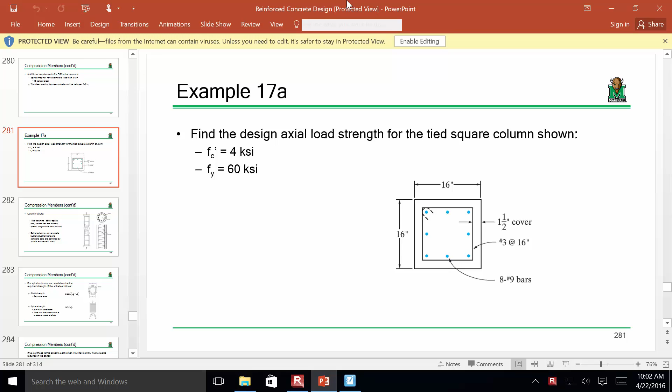So a couple things. You all have your homework 8 posted on Blackboard. It is the last assignment of the semester. I have a few hard copies up here, which means you might not have them. In addition, I also have homework...

I have your lecture notes for columns up here. What I'm going to do is finish these lecture notes today. We'll see if I can get through them. If not, they may bleed a little into Monday, and then we'll finish your last slides on beam columns.

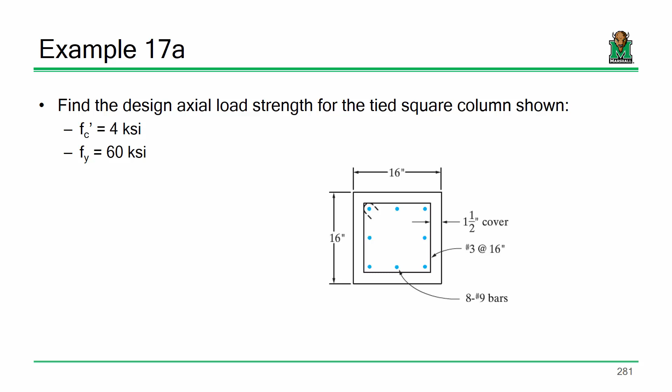We kept sucking at it. David never mentioned a thing until like the last lab. Oh, by the way... I was like, hey, get the tree behind that one. He's like, which one's that? I'm like, the one that's farthest away. He goes, I don't have depth perception.

All right, back to the world of concrete design. So last time we did an analysis problem of a square column. Today we're going to do an analysis problem of a circular column, and it'll be a fairly short one, and hopefully we'll be able to get into design today.

What I want to do though is get a little bit into the world of spiral columns. So tied columns, the way that they fail, if you recall, once the concrete spalls outside the rebar and the rebars begin to buckle, it's over. The column's gone. Spiral reinforced columns, on the other hand, serve to contain the concrete inside the core a little better.

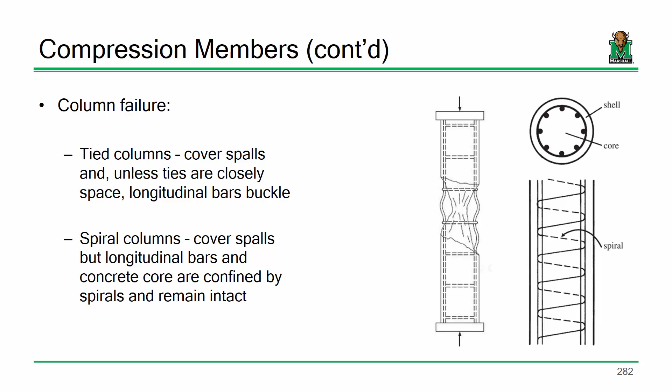It's a lot like a pressure vessel that you all did in mechanics of materials. You have a cylindrical pressure vessel, there's a pressure inside, and you develop that radial stress and that hoop stress. I know you've done it before, I know I did it with my deformable folks. You say that like we actually did. Oh yes, you did. Yes, you have.

So the idea behind the theory is that once the concrete on the outside of the cage spalls off and fails, you've got this core of concrete inside your spiral reinforcement that's being subjected to compressive load, and it's a lot like a pressure cylinder. You have a cylinder, you take a compressive load, that cylinder develops internal stresses. The same provisions that come from that are what we use here.

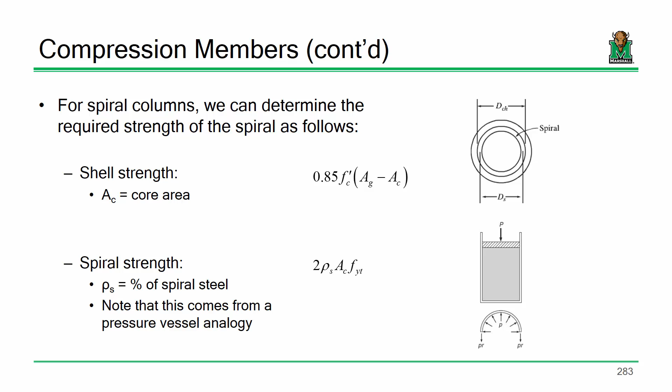For the shell strength, we say it's 0.85 f c prime times the gross area minus the area of that core inside. Now for the spiral, we basically say it's 2 times the reinforcement ratio times that area. That 2 basically just comes from the pressure vessel analogy that you did in mechanics of deformable bodies. I promise you did it.

So basically the idea is you're setting these two equal to one another, and you're trying to determine do you have enough of a spiral reinforcement ratio, enough of that spiral steel, to resist the capacity of that load inside the core. So you're basically just setting the two equal to one another and solving for rho.

Now what does the code do? Technically the math comes out to be you get a constant of 0.425 because you take that 0.85 and divide it by 2. Code says, just round it, keep it simple. So that's where you get that reinforcement ratio.

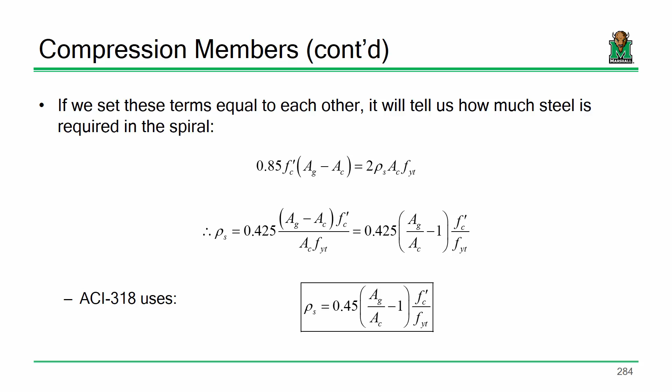Now how do you actually compute that reinforcement ratio? It's a little different because it's not just area of steel divided by area of the concrete, because you have to consider you're trying to determine that percentage of steel spiraling up the column. So we compute it as the volume of the spiral divided by the volume of the core to get that percentage. Now how do we do the volume of a core?

We're looking at that percentage within a given pitch, within a given increment of spiral spacing. For the concrete, it's the volume of a cylinder. And how do you calculate the volume of a cylinder? It's the area times the length. So the area is pi d squared over 4, the diameter of that core, and the height is just that pitch, S.

Now how do we compute the volume of the spiral? Basically we're taking the area times the length, and that length is essentially the perimeter around the circle. So that's where we get the area of a single spiral bar, and then the perimeter. How do you calculate the perimeter? It's pi times the diameter.

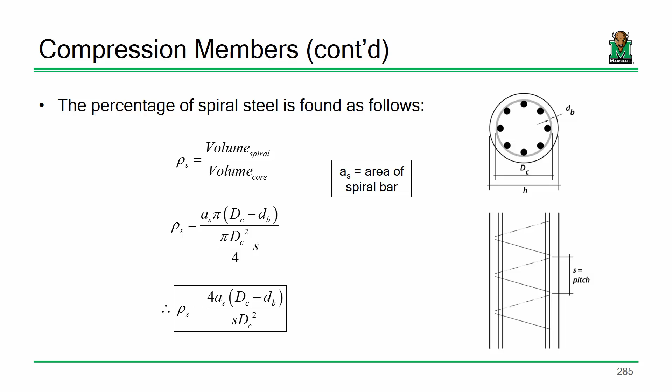Why are we subtracting a bar diameter? Because you have to come in half a bar diameter on one side, half a bar diameter on the other. So this is what you see in this box. This is the actual reinforcement ratio that you're getting from that spiral reinforcement, and that's your limit. As long as you have more than that, good to go. Does that make sense?

Good stuff. All right, so we're going to look at the design axial load of this column. I think you're going to find that it's a pretty straightforward analysis. The only thing that changes are some of your constants inside your capacity equation. The phi is different, the alpha is different, but ultimately the capacity is pretty straightforward. In addition, we're going to do that spiral check, and I think you're going to see it's pretty plug and chug.

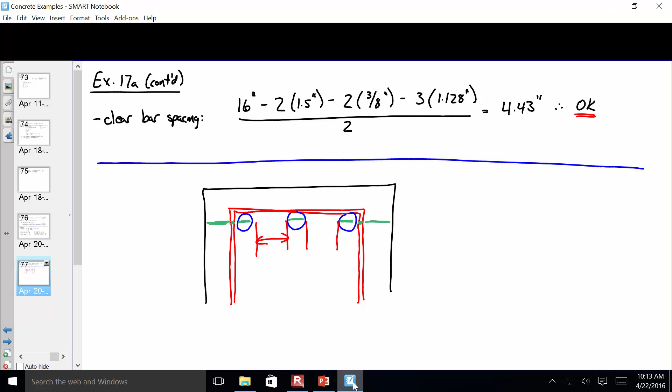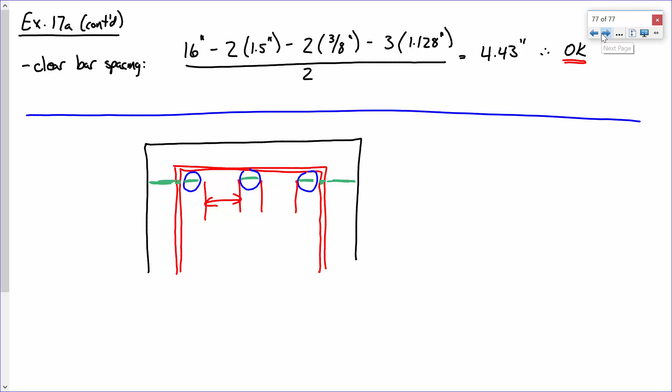Bar diameter, I can see how that would be confusing. It's very common to use that symbol to represent a diameter. Yep, that's pretty common.

Okay, so let's look at some column parameters.

All right, so we've got our typical material parameters.

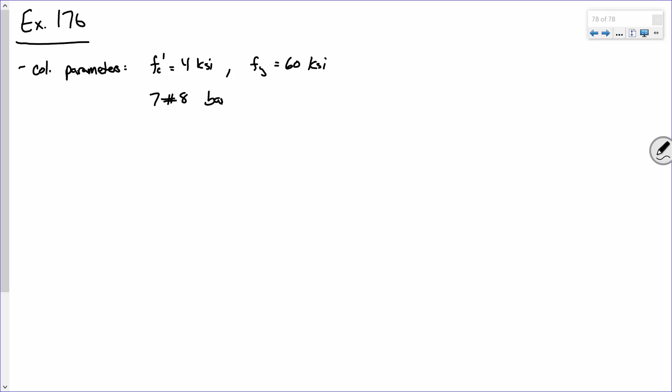Now, for our longitudinal steel, we have 7 number 8 bars. Does anybody remember how to calculate the area of that?

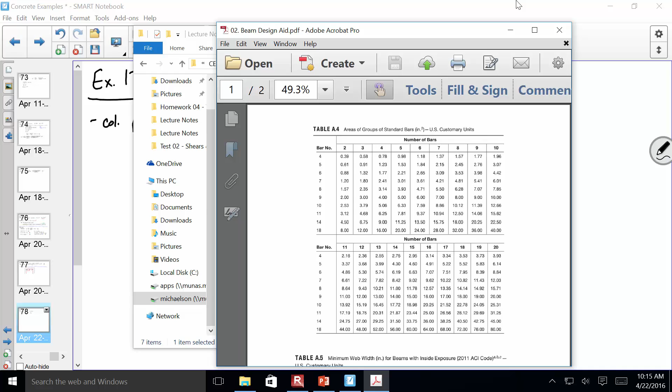There you go. And what is the area of 7 number 8s? No, that'd be if it's number 9. Do you remember this? So 7 bars that are number 8 in size, the area is 5.5. Remember that?

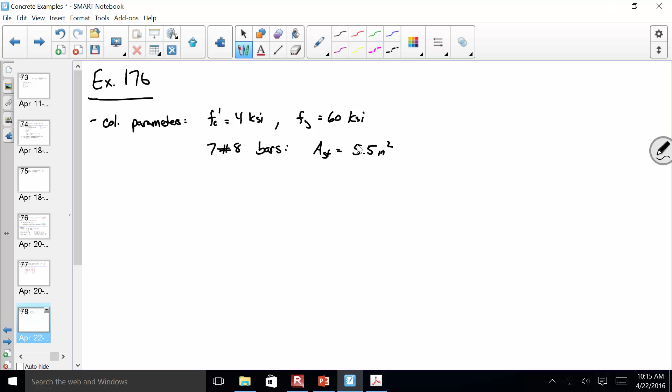All right, now we have a diameter of the column of 15 inches. And what is the area of a spiral bar? What are the spiral bars? They're number 3s, right? So the area of a number 3 is 0.11, right? Y'all okay with that?

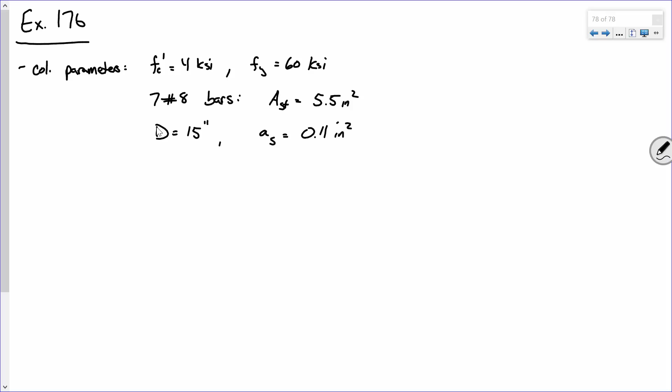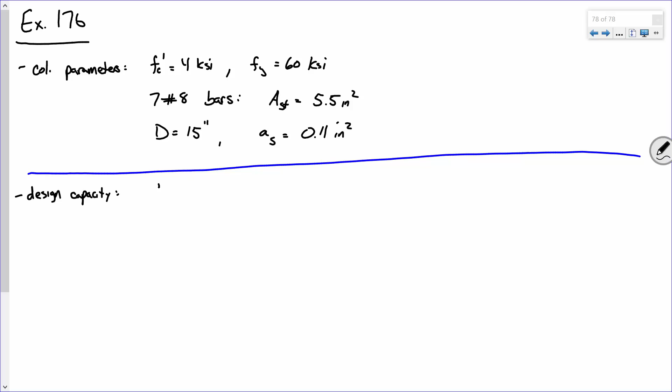Excuse me, so for the design capacity, it's pretty straightforward. We're dealing with a spirally reinforced column. So what's phi? What's alpha?

Make sense? Now, how do we calculate the gross area of the column? Before, it was just rectangular, so it was b times h, or b squared, because it was really a square column. How do we calculate the area? It's a circle, so there we go: pi over 4, d squared.

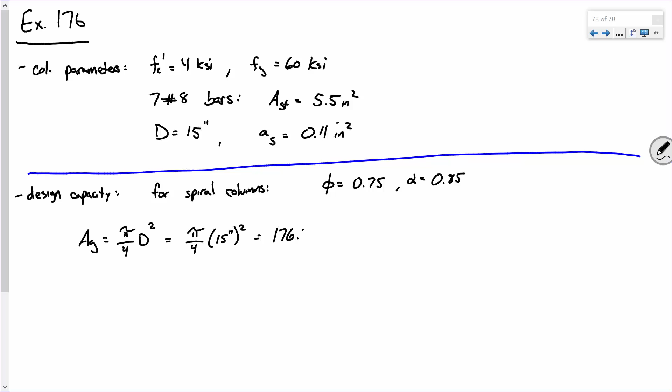Not too bad, right? All right, so...

So to calculate phi PN, we say phi times alpha, and then we've got 0.85 FC prime times the area of our concrete, which is just AG minus AST, plus FY times AST.

So filling this in, somebody help me out. What do we got?

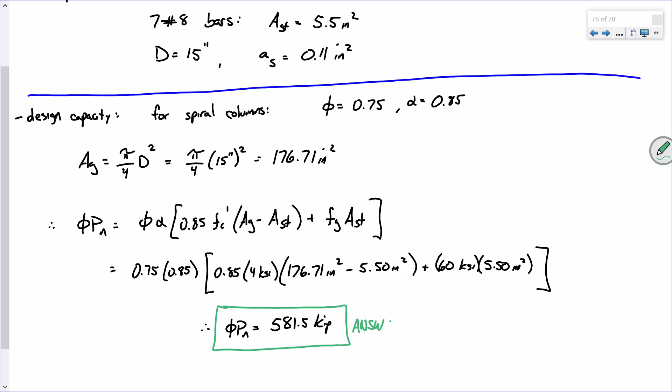That's it. Well, we also are going to check the spiral steel, but in terms of capacity, yeah, that's pretty much it.

True, but even then, that's a pretty plug and chug expression. You like this stuff? Honestly, the beam column design and column design, it's pretty simple. It really is.

That was a good one. He said he hopes it doesn't spiral out of control. Just saying, when you graduate and you're gone, I'm taking credit for that one. Just saying.

All right, has everybody got everything on this? Am I good to move on? Okay.

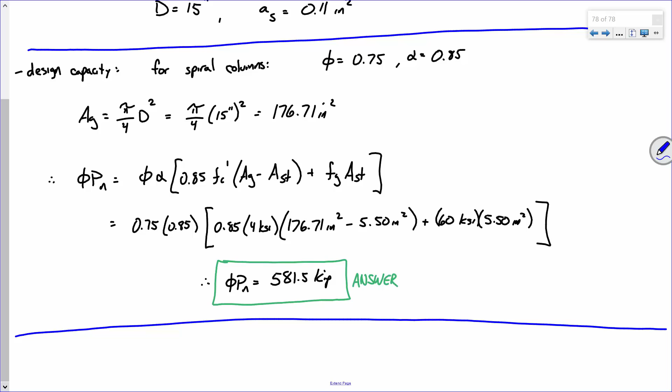I do this the whole time.

All right, spiral steel check. Okay, so it's pretty straightforward. I'll walk you through a couple things. So we first off need to calculate the diameter and the area of the core.

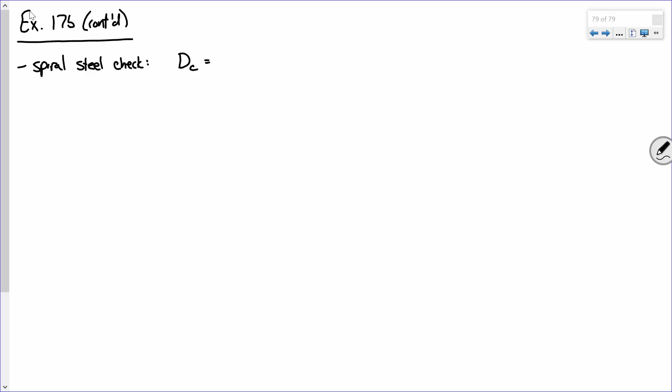Now the core, what we do for that is we say, all right, and we keep it simple. We say, well, the whole column is 15 inches, right? And the cover is 1.5 inches, right? So we just come in 1.5 inches on each side.

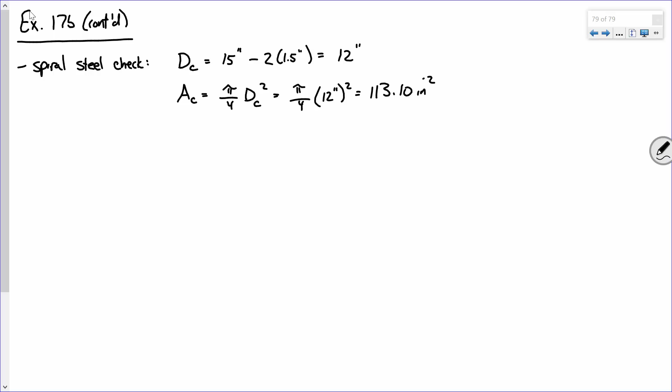And say the core column diameter is 12 inches. So we can calculate the area of the core by saying pi over 4 DC, or DC squared, and get that.

Okay, so it's pretty straightforward. We start off by computing our spiral reinforcement, what we actually have in terms of a ratio. So we're calculating the volume of steel in a single pitch divided by the volume of concrete in a single pitch to get that reinforcement ratio.

And that is 4 times the area of a spiral, DC minus DS, in that core diameter, but we come back off of, we come back 1. And then S DC squared. So 4 times 0.11 inches squared minus... now, remind me, what is the diameter of a number 3 spiral? 3/8. There we go. Remember, number 3 to number 8, you divide it by 8.

What's the pitch? What's the pitch of our spirals in this problem? 2 inches. Plug and chug, and what do we get?

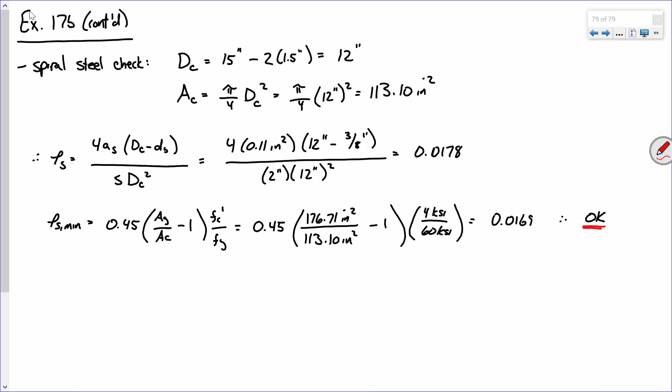Yes. Well, okay, that's a good question. And what I'll say to that is this: spirally reinforced columns, you confine your core better, you get a bump from your eccentricity and your phi value, and down the road, if you ever run into things like seismic demand and what have you, they perform better in seismic situations. So good question. Where'd my little mouse? Okay.

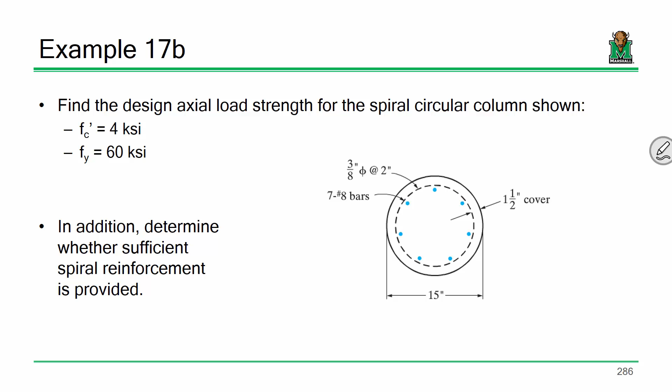We're going to talk about design here in a little bit. The design is, again, the design is simple, okay? Let me explain how design works. So if you liked the analysis, you'll probably like the design as well. Okay, all right, so column design is pretty straightforward.

You start off by saying, all right, let's figure out our factored load, 1.2 dead plus 1.6 live. Let's take a wild guess as to what our reinforcement ratio needs to be. It's got to be between 0.01 and 0.08. That's code limits. A good starting value is 0.02. 0.03 is not the worst idea in the world. Most of the time, I'll dictate that to you, what you need to use for a starting value. But if you don't know, 0.02 is a good place.

Now, here's the thing. You're going to do that so you can solve for the gross area of the column. Now, what's going to happen is you're going to say, all right, let's solve for the dimensions of the column, and you get 15.82 inches. Are you going to design a column that's 15.82 inches wide? No, you're going to say, let's use 16. So you're going to take the column and use a different size. So now that you've got a different column size, go back and solve for the steel that's required. Okay, after that, check your details.

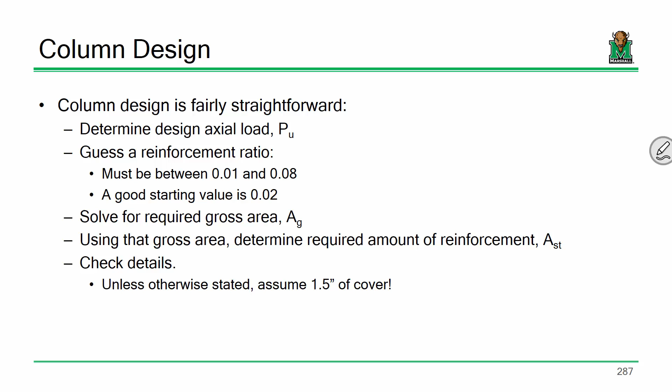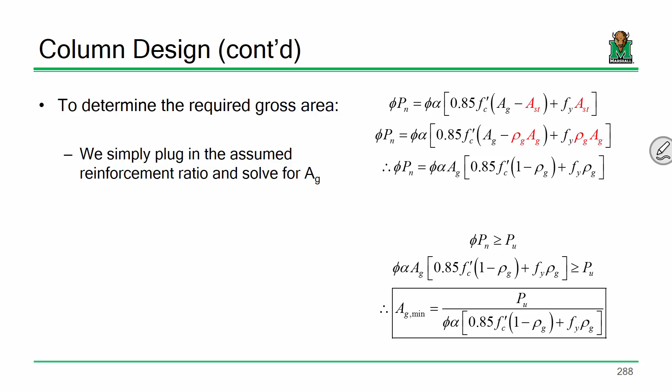That's it. So here's how this works. So in order to determine the required gross area right here, basically what you do is you set phi-PN greater than or equal to PU, and you solve for the required gross area, and it's pretty straightforward. We make a blanket assumption right at the beginning that the area of steel that goes into that column is the gross area of the column times this assumed rho g value. That's where that 0.02 comes into play. So assume a rho g value, plug and chug. You'll get a gross area of the column.

Then you've figured out your dimensions. Take those dimensions, plug them back into the expression, solve for the area of steel. You can't just take that new column and multiply by 0.02 to get the steel. You have to actually go through and compute it, because your column dimensions at that point are different than what you solved for. So, but in the end, everything's already derived for you. It's pretty plug and chug. Solve for your gross area, pick a column size, solve for the steel. Pretty straightforward.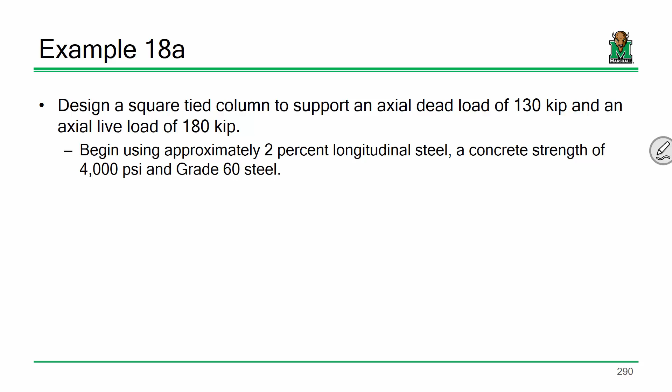Okay, so let's start off with A: dead load of 130 kips, live load of 180, 2% steel, 4 KSI, 60 KSI concrete and steel respectively. All right.

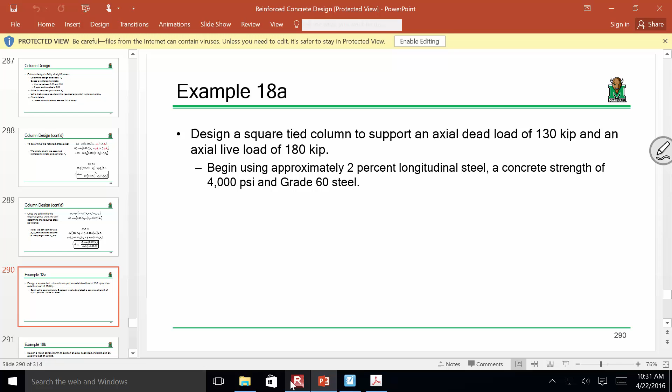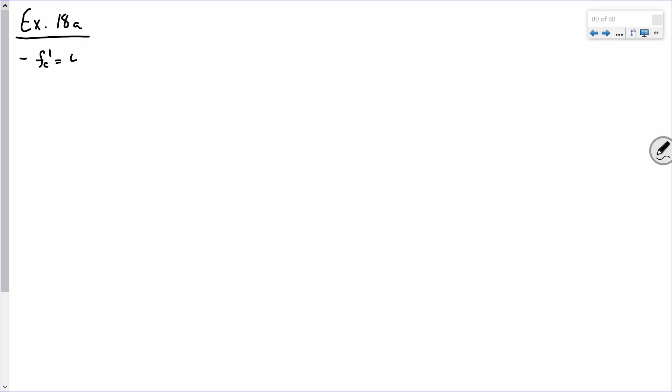So now we are in column design mode. So we've got, I'm going to put it like this, our starting rho value is going to be about 0.02. That's going to be our starting value. All right? We've got a dead load of 130 and a live load of 180.

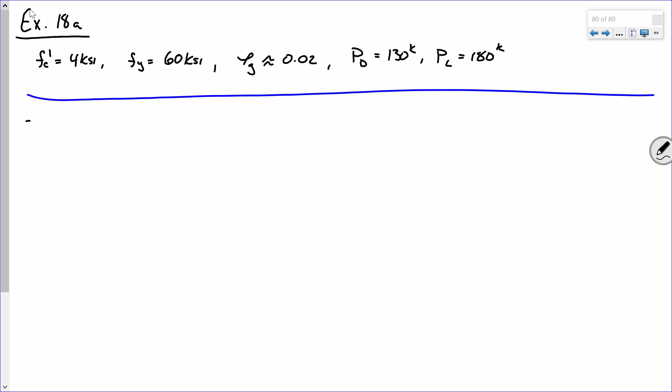What's the first step? Factored loads. Should be old hat by now. I have a feeling some of you have already done this. What do you get? There we go. All right.

So now if we go into column design, if we're dealing with a tied column that is square, what's phi? And what's alpha? Therefore, our minimum gross area—and again, this just comes from taking phi-pn, set it equal to pu, make a guess on your steel, and solve. It's pretty straightforward. So on the bottom we have phi alpha—whoop, I'm getting ahead of myself.

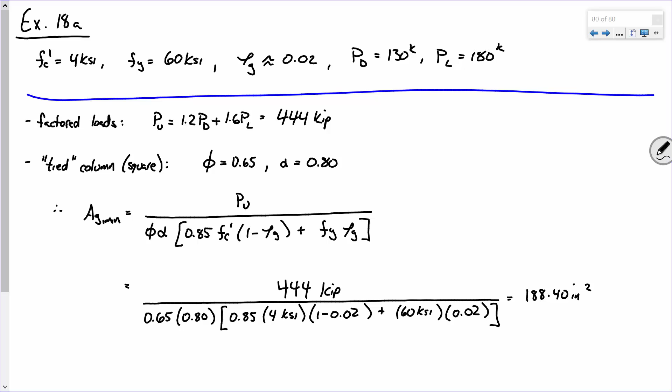Maybe a parenthesis somewhere. So if this is a square column, how do I determine what the sides of those columns are? How do you calculate the area of a square?

There you go. So B min is the square root of AG min. Hold on, let me do something. Move that down a little bit. What do you get? What do you think we ought to do? Not too bad, right?

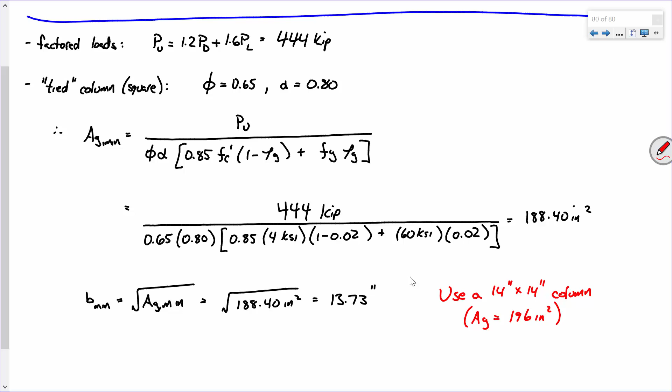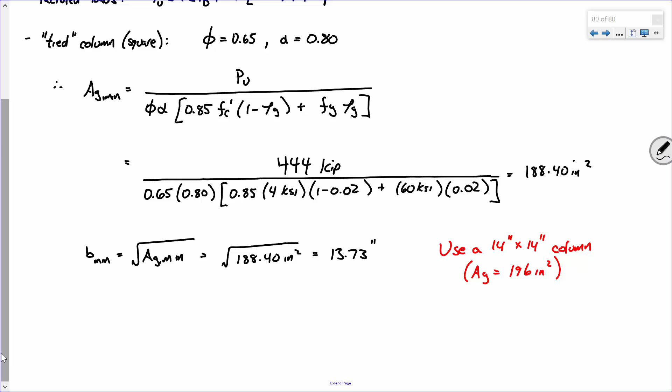Straightforward? All right. So I'm probably not going to have room, so can I go ahead and go on to the next panel?

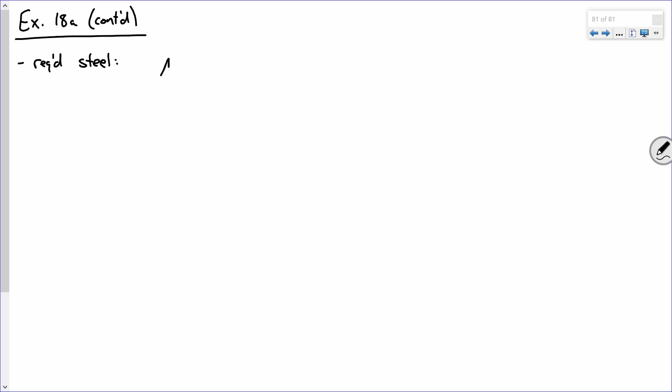All right, so AST, and again this just comes from your plug and chug, your second plug and chug expression. You get... I'm drawing that really long just because I want to have room.

All right, so again just plug and chug. So on the top: 444 kips minus 0.65, 0.8, 0.85, 4 KSI, 196, and then 0.65, 0.8, 60 KSI minus 0.8 - oh nope, sorry, 0.85.

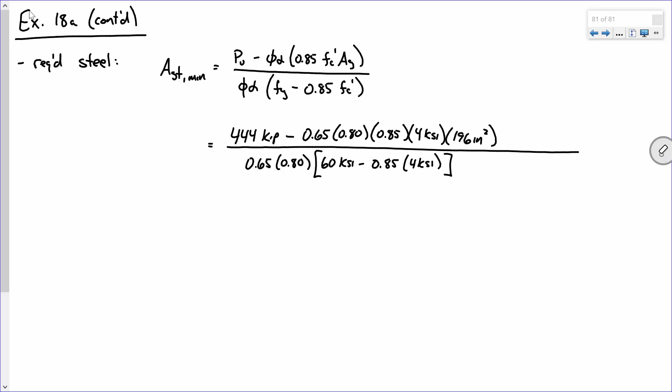And what are we getting? 3.312 square inches. Everybody else get that? Not too shabby, right? Okay.

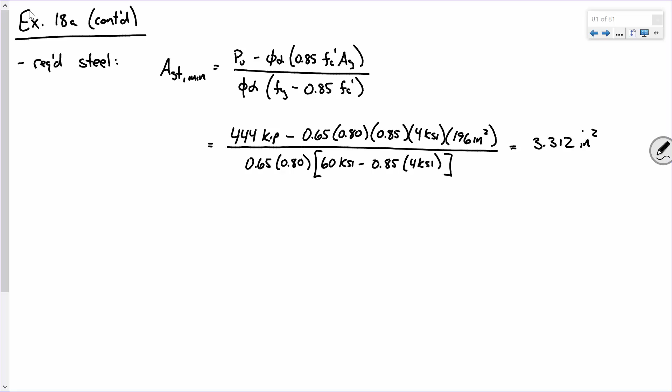Now that is the required area of steel. How do we actually go through and select what we need? Well, that's where this comes into play. Remember that? That should look familiar. All right, the longitudinal steel. And there's no spirals, this is a square column, so it's just ties. All right, so help me out.

Let's see if we can make sense of this. Let's pick a couple options. Bar number, maybe number 6, maybe that one, 3.53 - that'd be a good one. There we go. 10 number 18s, that's like the W14 by 800 in steel design. Whenever in doubt, just pick the W14 by 800. It'll work every time - yeah, you won't be in business very long.

Now that one works, right? 5 number 8s, 3 number 10s. Now, and then right there, what's that? Well, we're going to get to something, and you bring up an interesting point. It's a square column - what is the least number of bars you can have in a square column? 4. So you can't use this.

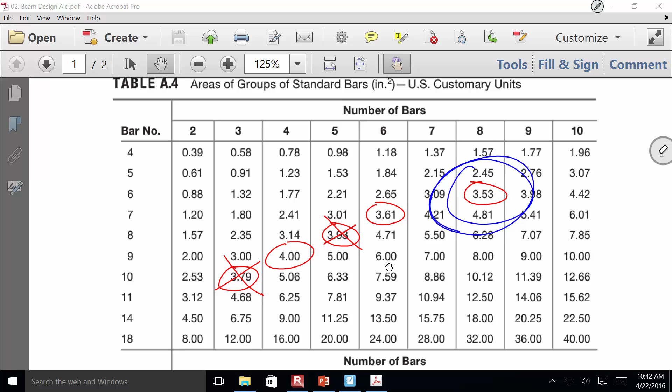So I wanted you to understand the logic behind why we selected the bar pattern that we did. An even number of bars makes sense. We can't go below 4 bars, so we just pick the one that has the least area, and that's it. So 3 on each side, yes. What? Well, yeah, there's nothing wrong with that. Well it just depends on how your column's oriented, but what we're talking about lends more into our beam column discussion later.

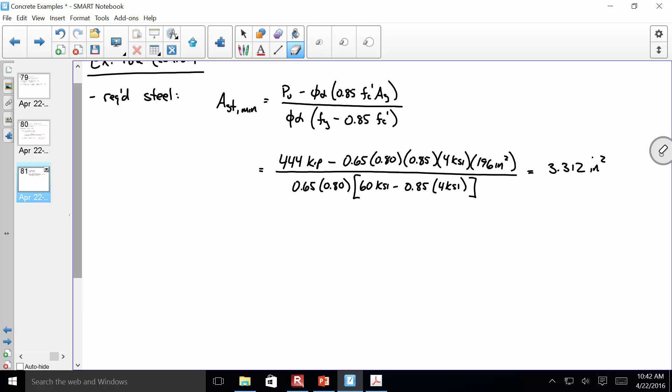So let's see... our tie selection. Okay, now with ties - well hold on, let me write this down. I'll say use 8 number 6s. Is that what we said, 8 number 6s? Okay, all right. Tie selection - we go with either a number 3 or a number 4. Which one do you think we ought to go with? Yes, sir.

We picked this one right here. We picked that one, the 3.53, 8 number 6s.

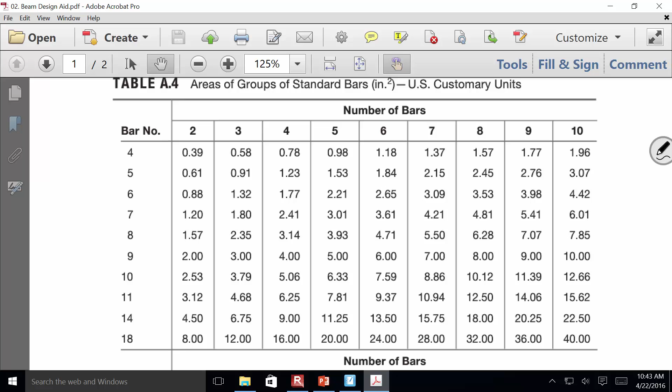Yeah, it's starting to spiral out of control. Not quite there yet, but... I just did. This isn't hydraulics. All right.

So for our tie selection, we're really going to go with either number 3s or number 4s. Which one should we go with? Why? Well, there's a reason why. What's the difference? Remember, you use number 3s up until your longitudinal bars are a size number 10, and then anything above number 10, use the number 4.

Our bar size that we selected was a number 6. So we'll say, since longitudinal bars are smaller than number 10s, use number 3 ties.

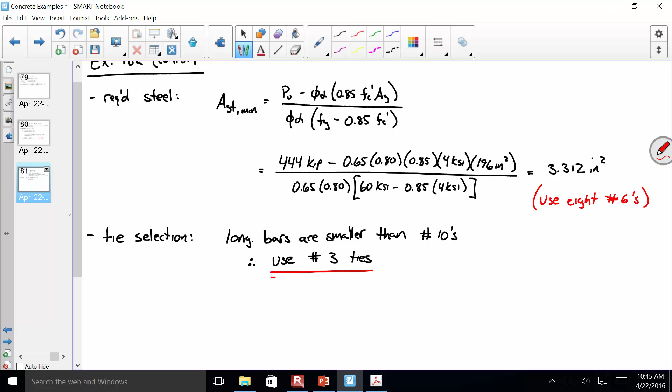Now, in the world of design, I would prefer to use the least amount of steel possible. So in terms of spacing my ties out, I'd want to go with the maximum tie spacing possible, right? So let's look at maximum tie spacing.

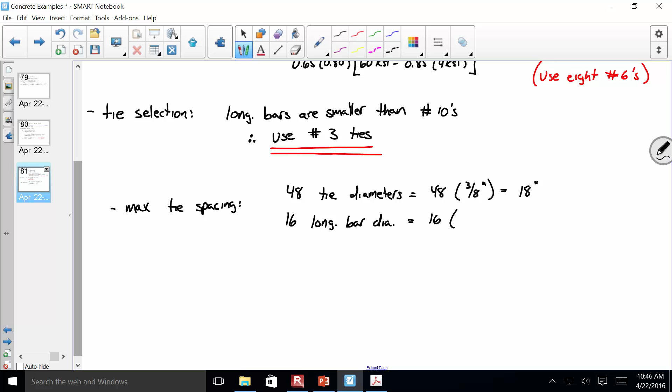And if you remember, we have 48 tie diameters, which is 48 times 3/8, which is what, 18? We've got 16 longitudinal bar diameters, which is 16 times, what's the diameter of a number 6? 6/8 or 3/4, or 12 inches.

And the least column dimension, which is what? Make sure y'all pay attention. What's 14? So we have to go with the minimum one of those.

So I'm going to say use number 3 at 12 inches.

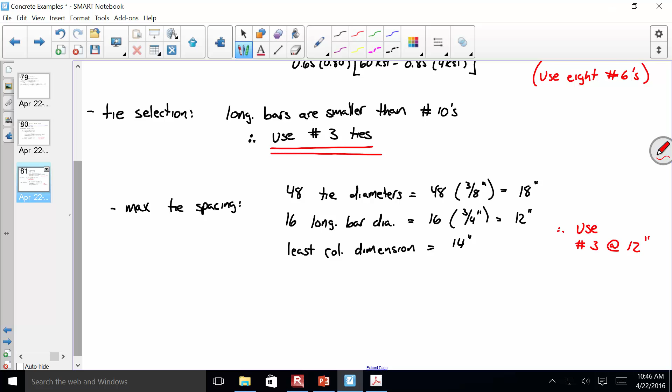So what does my column look like in the very end? Looks like this.

Eight number 6s, we have... let's go ahead and go with a 1.5 inch cover just to be consistent. 14 by 14 inch column.

And that's it. There's only two other things we have to check, which are really short. But does everybody understand what we just did? And there you go, that's it.

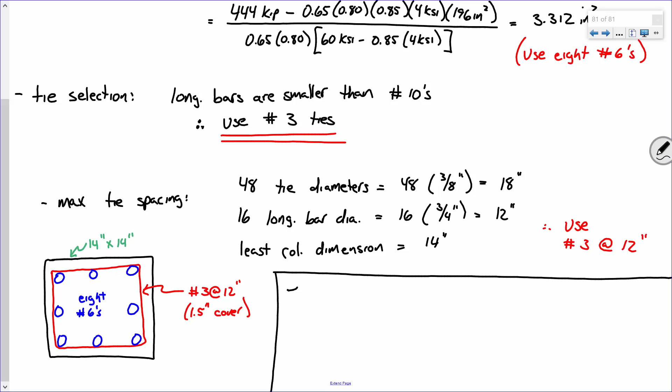We had a rho ratio that we started out with of 0.02. That was a guess. We need to check what we actually got in the end. So rho g, I'll say actual, is 8 number 6s, which is, let's say, area of steel divided by the gross area, which is 3.52, 196. So that's 0.018. Is that good?

It has to be between 0.01 and 0.08. But remember, we selected 0.02 for the purposes of design. We didn't get that in the end because we iterated where our column dimensions changed and what have you.

So there's that. And then our clear bar spacing—remember, that's got to be less than or equal to 6 inches. So let's see if we remember how to compute that. We take 14 inches, subtract 2 covers, subtract 2 ties, subtract 3 bars (3 longitudinal bars), and divide that by 2. Y'all remember that? You do that, and you get exactly 4 inches.

Is that good? It's got to be less than 6. If that came out larger, you've got a couple options: either A, pick a new steel layout, or B, maybe increase your cover a little bit—make it 2 inches of cover, and then it's funny how your bars shrink up a little bit. Comes in. Sound good?